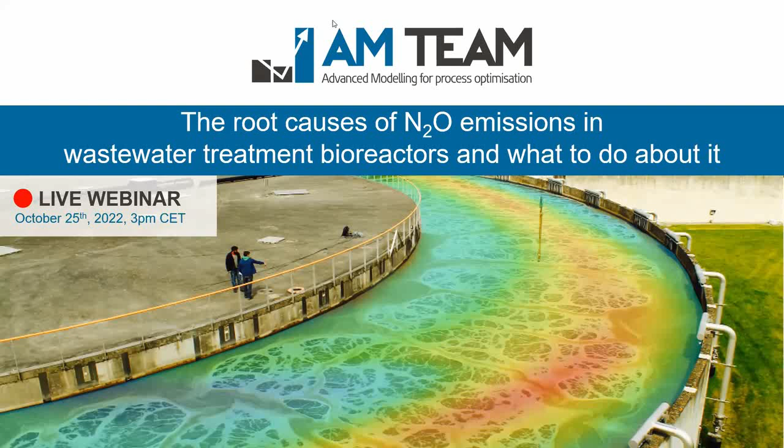Welcome to this webinar on the hot topic of N2O emissions. It is a topic we are all very interested in as a wastewater community, and it is gaining significant importance. And today we have the pleasure presenting you content that relates to the root causes of N2O emissions in wastewater treatment bioreactors, and also what to do about it once you know those root causes.

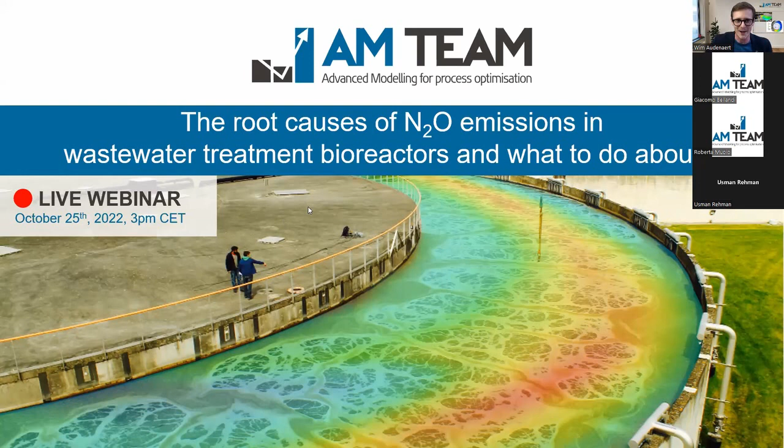So what are the objectives of today and what is the format of this webinar? Well, of course, I already said it. N2O is a very important topic. It was not like that maybe a decade ago, but nowadays the importance is growing a lot, or at least the attention, because as wastewater community, we realize that the contribution of nitrous oxide emissions to the global carbon footprint of the water industry is significant.

And we hope to achieve two things today, maybe a couple of more, but these are the key things. So we want to provide you with new detailed process insights that have really practical value for you, things you can use in your daily operations, and also that you understand the practical application and the potential of CFD combined with kinetics of N2O for assessment of N2O, but also to test mitigation strategies.

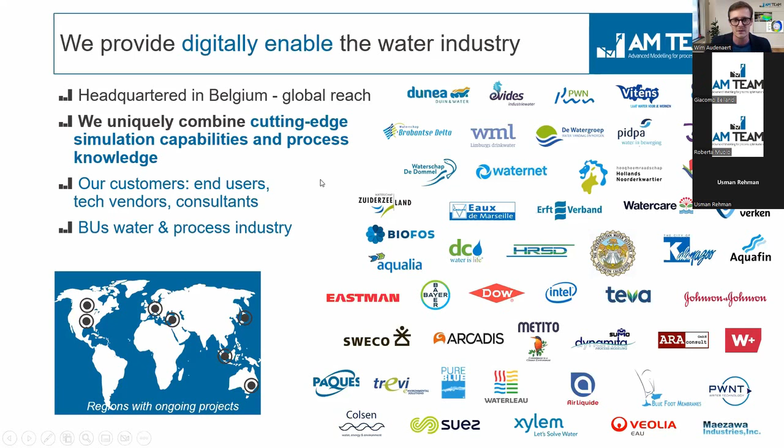So we really want to digitally enable our customers with very good process models. So this is the theme of today. Let's start with me.

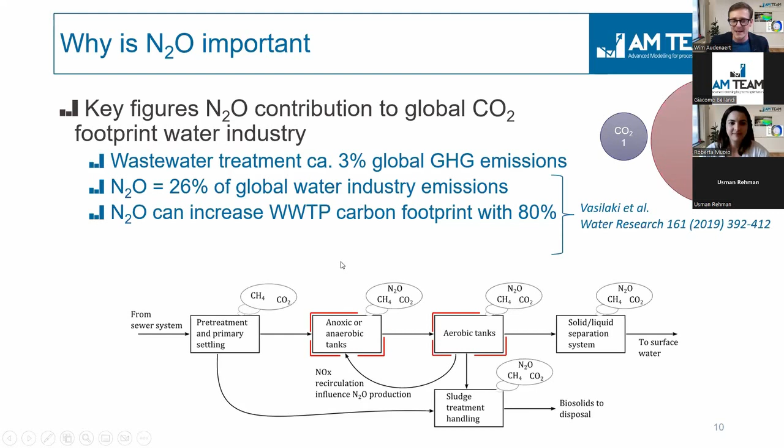And where is it formed? Mainly in the aerobic and anoxic tanks in the biology. That's what you can see here. And this is where we are going to zoom in on in this webinar.

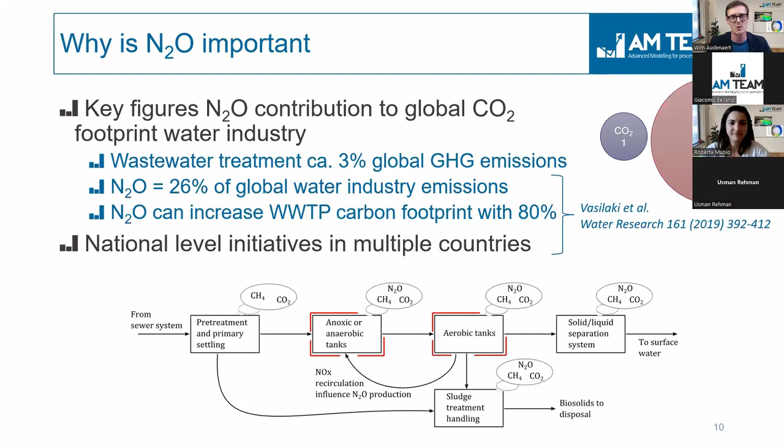Multiple countries worldwide start focusing on it heavily, and actually every year this list is growing. Now we see a drastic increase of attention on this topic.

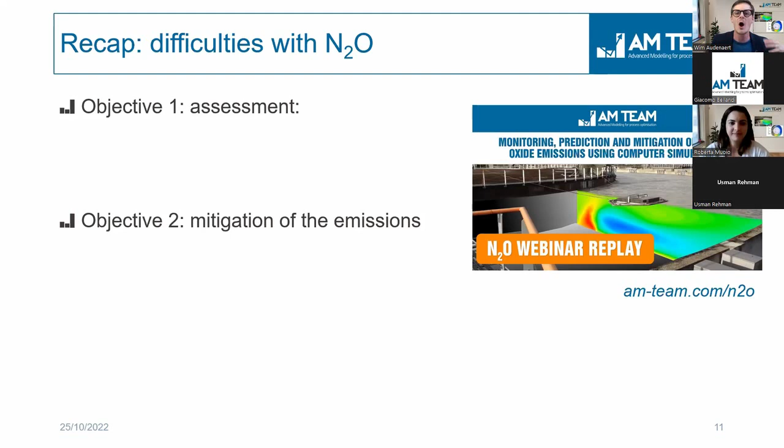So in the last webinar, we asked the question: what are the major difficulties practitioners face? Actually, you can divide them into two categories. The first one is the assessment: how good or how bad are we doing? Typical questions that pop up there are: how is the N2O emission at my plant? Which ones are the hotspots? How do I prioritize, and how do I adequately assess those emissions?

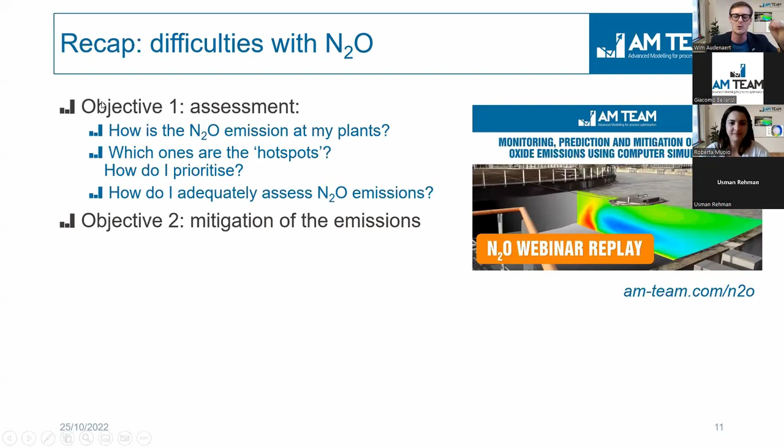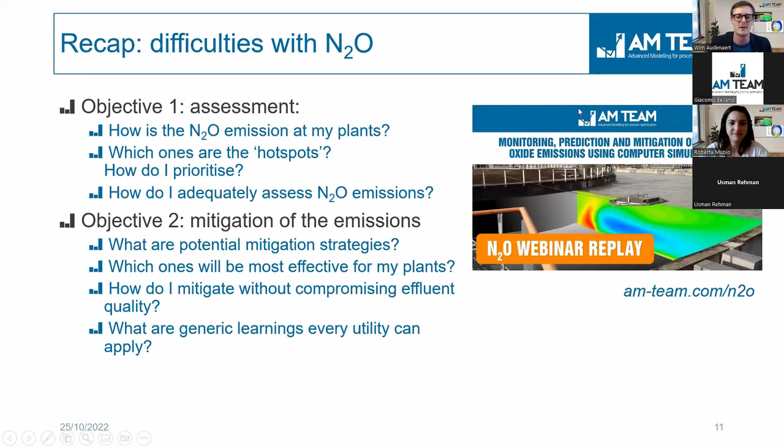Another slide from the last webinar is what drives N2O emissions. On the one hand, we have influent quality. We shouldn't need to explain that changes in quantity and quality matter, and you have to adapt your operation to that. Also, operational changes can be made, and they can be very specific for plants.

And then, of course, you have a huge variety of systems. We don't only have conventional activated sludge, for example, but even within one category, you have a tremendous amount of different designs -- that's the reactor type and design. And a very important topic we wanted to highlight is also the local conditions.

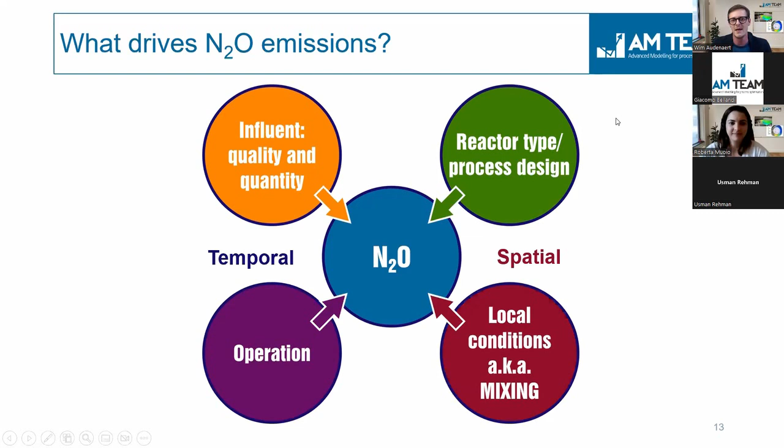This is very visible if you combine CFD, which is actually a 3D simulation, with biokinetics. So what we see on the screen right now is a bioreactor, a top view and a side view. If you do some simulations, you can visualize gradients of local oxygen, local ammonia, local N2O, local nitrites, and things like that. This is possible with this combined framework.

Typically, when we look at full-scale systems, you see very drastic gradients, not only in the length, but also in the width and the depth. Just look at where this gas hood is measuring. You can already imagine that if you moved it a few meters, or you're measuring liquid N2O and you moved your sensor by 5 or 6 meters, it would have an impact on how you take conclusions and how you calculate your emissions.

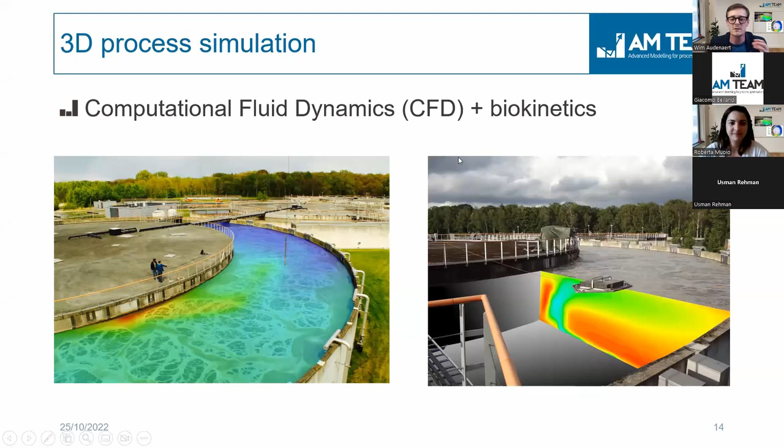This topic has been important in the previous webinar, so feel free to watch it back. And next to mitigation, we also support these measurement campaigns very well with this tool.

Okay, so that was a short intro, setting the scene a bit. And now we go to the meat of this webinar. We decided to go rather deep into the mechanisms of N2O because we think it's very interesting to understand them, and that you can take better decisions based on them. We try to make it digestible for people who don't have too much background in N2O. We took that risk, but don't misunderstand us. We will go deep, but the practical outcomes are what we try to illustrate in the last part.

So the root causes of N2O production. When we look at the basics of wastewater treatment, most of you know nitrification and denitrification. That's really the core of nitrogen removal. You have two bacteria, the autotrophs and the heterotrophs, that are collaborating. It's the same in a conventional system or a biofilm system. The configurations are different, but they are collaborating.

The first group, the autotrophs, oxidize your ammonia and add oxygen more and more until nitrate. This is nitrification. If you feed this to heterotrophs, which eat carbon as a source, they are more comparable to humans - they eat organic carbon. The autotrophs don't really eat organic carbon. That's why there is nitrogen here. These bacteria bring it back to nitrogen gas, which is of course not a greenhouse gas, but in the process you have a side step, an intermediate, called nitrous oxide.

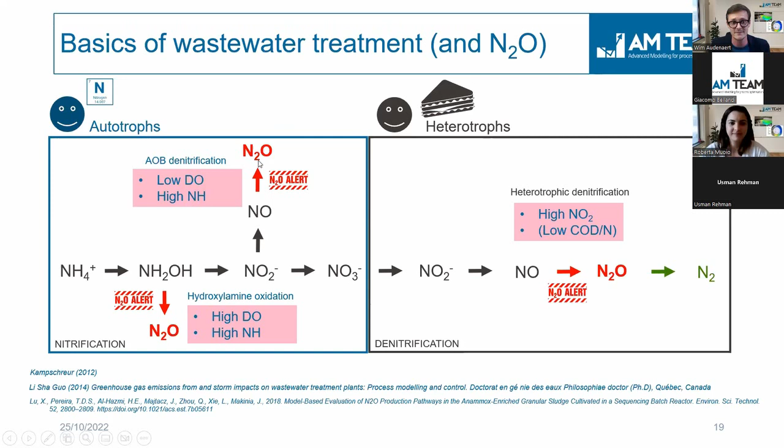Then we go to the autotrophs, and unfortunately they don't really work in a straight line. These bacteria have a side track, and it depends on local conditions. Typically at very high dissolved oxygen and high ammonia, they can form N2O from an intermediate called hydroxylamine. That's one pathway. Unfortunately they also have a second one from nitrites - they can also form nitrous oxide, under different conditions, this time low DO and high ammonia. So that's a summary of this mechanism.

So if we summarize it in three lines: autotrophs can produce N2O in two ways, while heterotrophs can produce N2O in one way. But importantly, they can also consume N2O in one way, so the net balance might even be negative or neutral. That's the summary.

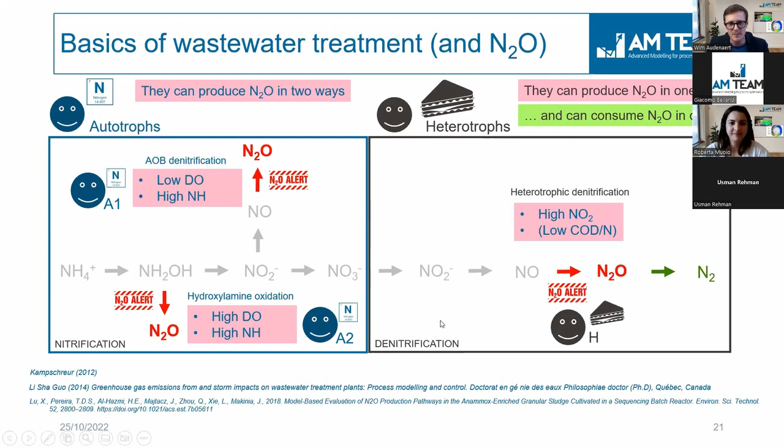To make it easily digestible, we will refer back to these blue ones, the autotrophs, as A1 and A2, and we will refer to the heterotrophic pathway as H, the brown symbol. So if you see these symbols reappearing, these are the three pathways of N2O formation. Good, let's go to a case example.

We will give the floor to Roberta Muoio, and she will introduce a real case example. Roberta, the floor is yours.

Thanks, Wim. So here we are presenting a pilot scale reactor, which is currently used by the water utility Watercare in New Zealand to investigate N2O emissions under different operating conditions. They are doing measurements under different, for example, influent conditions to evaluate the N2O emission. We are collaborating with them within a project, and the goal is to enhance piloting and an on-site measurement campaign to improve process understanding about N2O and biokinetic ASM in general, and to obtain effective mitigation of greenhouse gases.

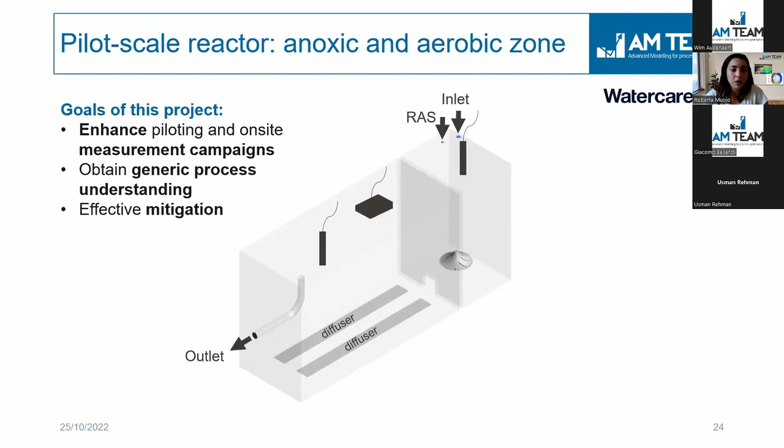So this is what we would measure. In this slide, you can see the liquid N2O concentration and the gas N2O concentration. This is a 3D CFD simulation, what we call a volume rendering—a 3D visualization of a concentration of a certain variable, N2O, inside the reactor.

On the left, we see the dissolved liquid N2O concentration, and we can see higher concentration in the anoxic zone and lower concentration in the aerobic zone. Red means a higher magnitude of concentration, and blue means lower concentration. We can also see in the gas that the higher gas concentrations are in the top part of the reactor and in the central zone where the plumes get out of the system.

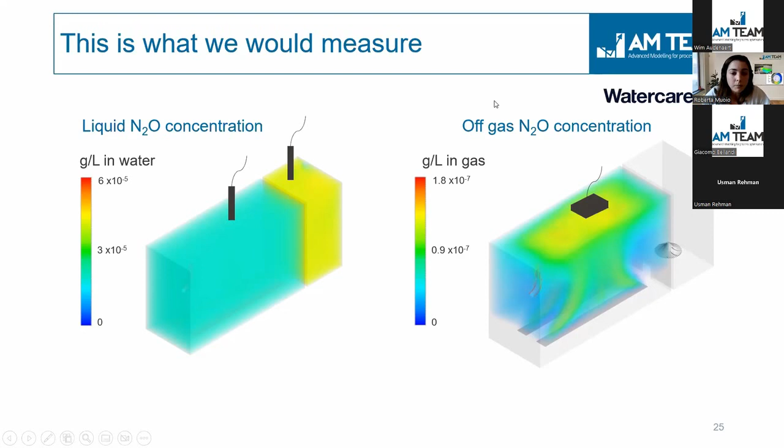So this is exactly what we would measure in a measurement campaign, placing some sensors.

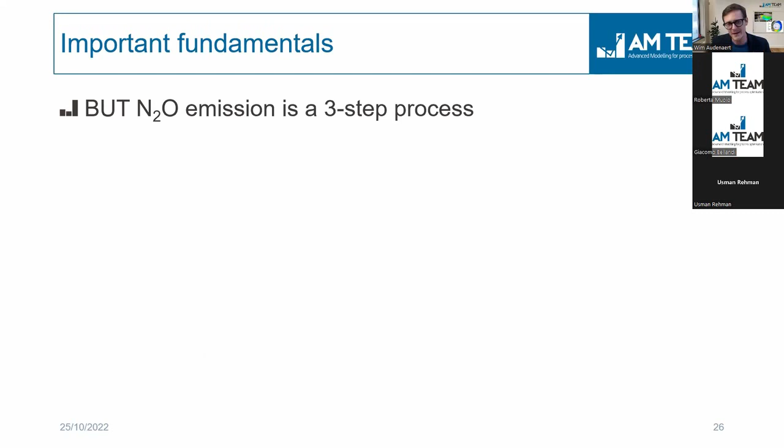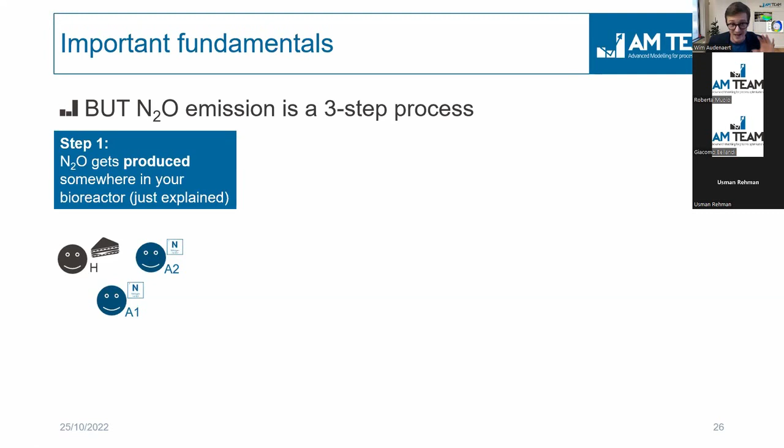Thanks, Roberta, for introducing this case. We will come back to this case later because this was not really the root cause. But what we would like to touch upon is the three-step process. What Roberta has shown is actually the result of this process. The first step is N2O, nitrous oxide, gets produced somewhere in your bioreactor. I already explained how—there are three main pathways, either by these bacteria or via the two pathways of the autotrophs. Just imagine they would not produce any N2O, we would not have an N2O issue. So that's really the root cause: these three pathways.

What happens secondly is, even though N2O is a gas, it actually starts in the dissolved form. So it gets transported through the water flow of your system, which makes it hard to know the root cause because it's already moving away from that. You will measure it somewhere in the form of liquid N2O.

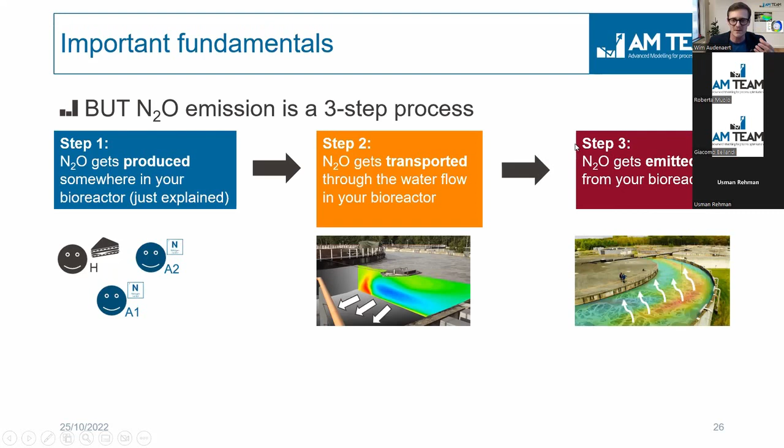And in a third step—and this is really causing the emissions—your N2O gets emitted because it gets stripped due to the aeration. The liquid N2O joins the aeration bubbles, the air bubbles, and goes up, and this is really causing the emissions.

So what we really measure, typically with liquid sensors or gas measurements, is the N2O in the water phase or the gas phase. But really the root cause is here. And what's also important is that what gets emitted is what causes the climate impact. So we have to distinguish between what we can measure, what causes the climate impact, and what is the root cause of the problem.

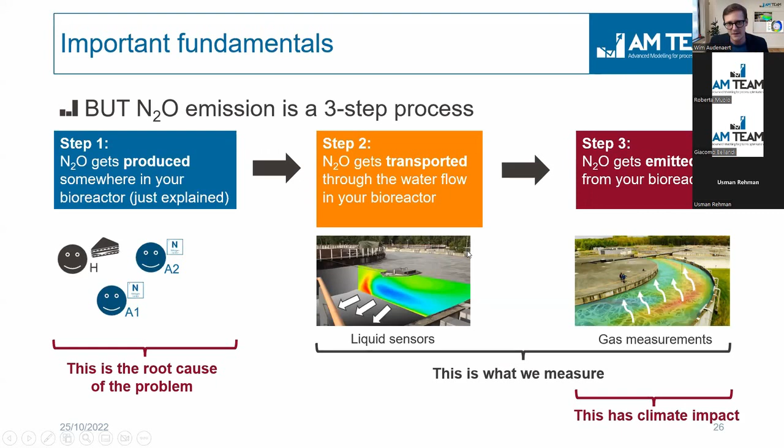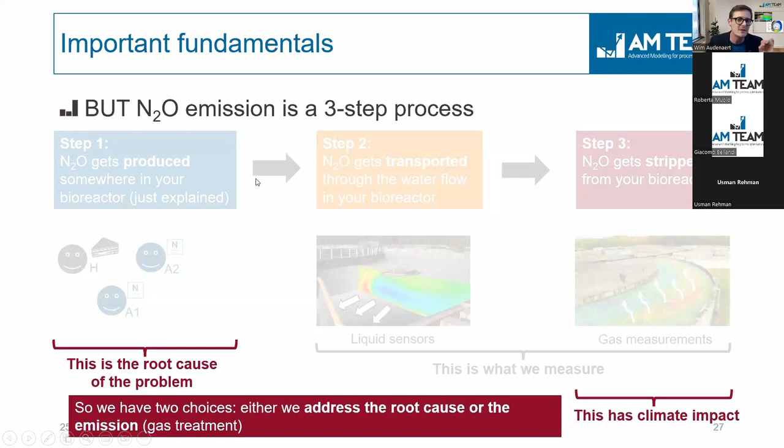If you approach this from an engineering point of view, we have two choices: either we address the root cause, which means avoiding N2O production or lowering it, or we treat the gas—an end-of-pipe solution. For some reactors, this works because they are covered, and then you also avoid the environmental impact. But in this webinar, we'll be focusing on step number one, the root cause. We believe if you understand the root cause, you can really effectively mitigate.

So Roberta, back to you. Yeah, thanks, Wim. So back to the pilot reactor—here again we see the dissolved N2O concentration in the liquid, in the anoxic and the aerobic zone.

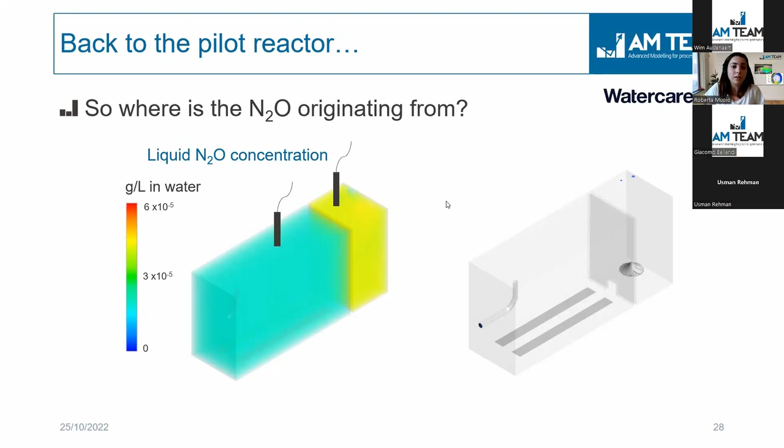What is interesting to see is that the concentration is quite homogeneous in the reactor—higher concentration in the anoxic zone and slightly lower concentration in the aerobic zone. So actually here, if we put some sensors, we are measuring the symptoms, but we don't know exactly where N2O is originating from and why it is produced.

So then if we go a step back to step one that Wim mentioned, we would focus on the root causes. Here we are looking at the production rate, the speed of reaction of heterotrophs in this case—how fast heterotrophs produce N2O, in kilograms per cubic meter per day.

And here we are looking at 2D images—a side view of our system. What we are seeing is that heterotrophs produce N2O, of course, in the anoxic zone, which is expected.

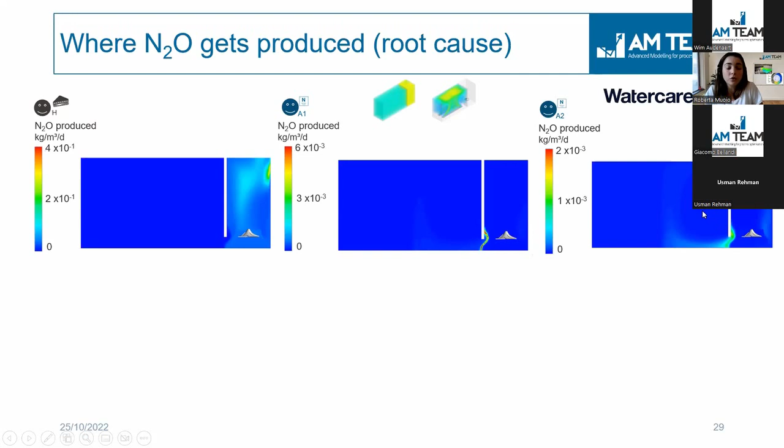Now, if we go to the autotroph pathways, A1 and A2, what we see is that A1 occurs in this transition zone between anoxic to aerobic, where you have lower oxygen but also high ammonia availability, and it's kind of the same for A2 processes. Now, if we would finally quantify the root causes, we would see...

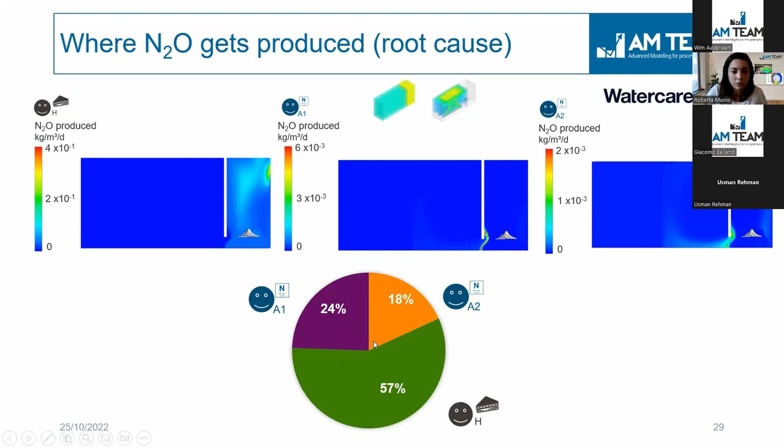In this case, 57% of the N2O is produced by the heterotroph and the remaining fraction by the autotroph. So it's interesting to note here that despite the two pathways, A1 and A2, occurring mainly in this transition zone, they account for almost 50% of the N2O production.

Now we can run a simulation, a scenario where, for example, we simulate what happens if our ammonia load increases. It's very common for ammonia to increase during the day in our influent wastewater. So basically what we see is that the heterotroph produce slightly less N2O. But very interesting to note is that now the autotroph produce much more N2O than in the case before.

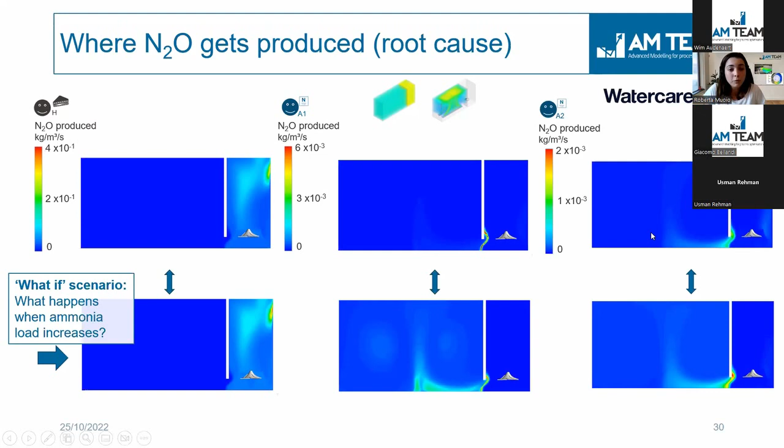So in the end, if we again compare and quantify the root causes, we would see that in this case, the autotroph produce much more. Wim, if you go to the next, please.

Here, if we compare the two scenarios, we would see that with high ammonia, the autotroph pathways are much more important in the N2O production. In particular, the A1 process accounts for 63% of production, while in the low ammonia scenario, most of the N2O was produced by the heterotroph.

So as you can see, a change in the influent composition, or even a change in the operating condition which we will see later, can drastically change the picture and the way N2O gets produced.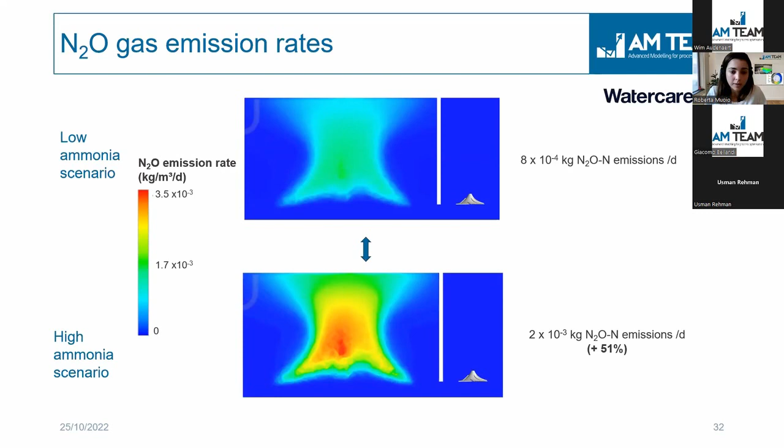So what we see is that by increasing the ammonia load, the N2O emission increases by a factor of 50%. As you can imagine, it's a huge variation that can happen on a daily basis in a wastewater treatment plant. And this is exactly what Explicit also measured with their drones.

Explicit used these drones to map the gas and were able to measure the N2O emissions in the gas phase. If you look at the plot here on the right, you can see that within 2 hours, they could observe a very wide fluctuation of N2O emission, between 50 and 100% difference.

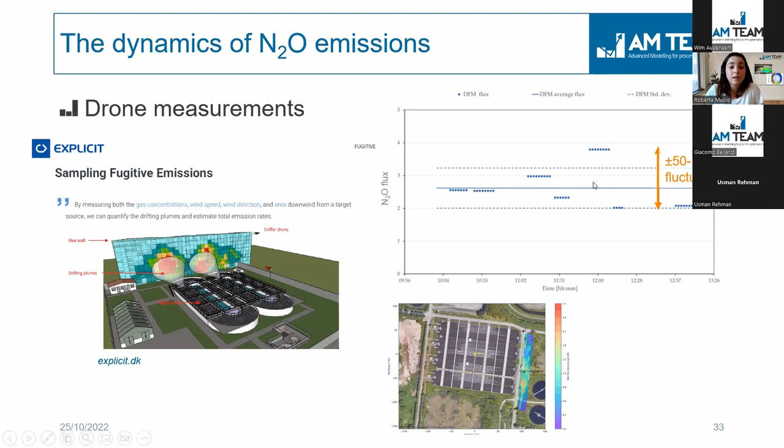And this can be caused, for example, by a change in the influent organic concentration or influent ammonia concentration.

Going back to the pilot reactor, here we see the summary of the N2O concentration in the gas and in the liquid in the two scenarios, low ammonia and high ammonia. This is what we would measure placing some sensor or hood for measuring the off gas. Basically, what we would measure is an increase of N2O in both liquid and gas in the case of higher ammonia.

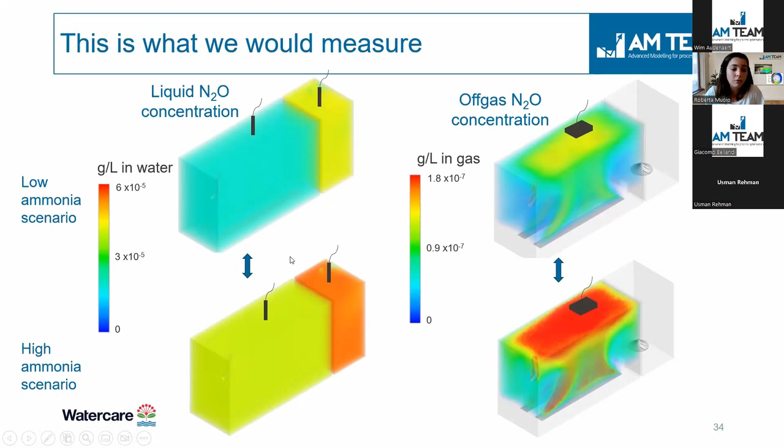Finally, the final goal is to really quantify the emission in terms of CO2 equivalent. Here we are proposing two indicators: on the left, the yearly CO2 equivalent emission, and on the right, the emission factor, how much N2O gets emitted per ammonia influent load.

So basically what we can see is that by increasing the ammonia influent concentration, our yearly emissions more than double. On the other side, we can see that the emission factor is slightly reduced because it's also linked to the influent ammonia, which increases.

So this is just an interesting point to mention: the emission factor should always be accompanied by some other indicator, for example, the yearly emission in this case.

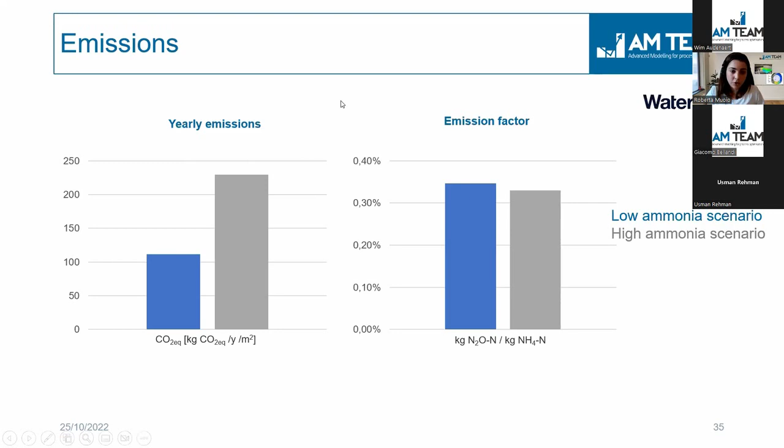Okay, so thanks, Roberta. We will go to full-scale plants in the next section, but this was an introduction because it's a simple system to understand, just an anoxic zone and an aerobic zone. And Roberta has shown that our model brings these three steps nicely together.

So if you paid close attention, what you measure is actually a consequence of the first step, but the gradients of the local hotspots of production are quite different compared to the gradients you would measure on site. And that makes it very hard to interpret such systems or to know the root cause.

So we have explained that the root cause can be found in three mechanisms, three production pathways. If you change the conditions—not only the influent, but also the operational conditions or design—these pathways can react very differently. It all depends on the local conditions of dissolved oxygen, ammonia, and carbon. So on-site N2O measurements, either gas or liquid, reveal the symptoms, but we believe that in order to cure the patient, it really lies in addressing the root causes.

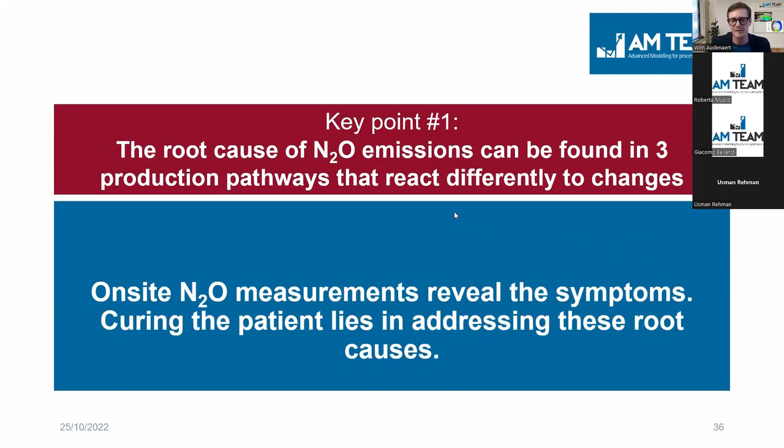Okay, so that was the first intro session on the emissions of N2O. I will go to my colleague Usman and ask if there are any questions.

Yes, thank you, Wim. There are a couple of questions. One question is: is it possible to separately measure or strategically put sensors to measure, for example, the AOB pathway 1 and pathway 2 process?

So maybe Giacomo, are you able to answer this question?

Yeah, thanks for the question. Distinguishing between the two pathways with a single measurement is tricky, and actually the three pathways might occur at the same time. You have production and consumption by the heterotrophs, and then production from AOBs. So with a single sensor it might not be feasible, but you can assist that with current knowledge and the use of models.

Yeah, the problem is a bit—they are not like reactive tracers, N2O 1, 2, 3. We don't know where they come from.

Indeed. Other questions, Usman? There are more questions, but I know you will be answering them later, so I will let you continue. Yeah, we will come back to that—okay, perfect.

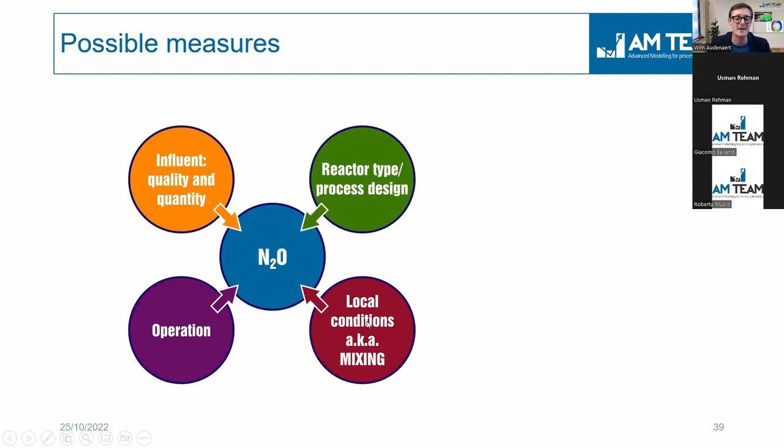Then you have operational measures, for example adjusting aeration, which is a very popular and well-known measure. Then, of course, design and reactor type changes—for example changing a mixer or changing the aeration system. All three together cause an interplay of gradients and mixing, which is very important. So we can play with these things together, but it should be tailored to the plant.

This is what we are going to illustrate in this section. In a nutshell, it comes down to avoiding extreme conditions in transition zones—for example, a moderate dissolved oxygen level instead of a very low or very high one, optimal sludge retention time, optimal COD or carbon-nitrogen ratios, and adequate mixing in the denitrification and nitrification zones to minimize these transition zone volumes. These are all measures that can be taken.

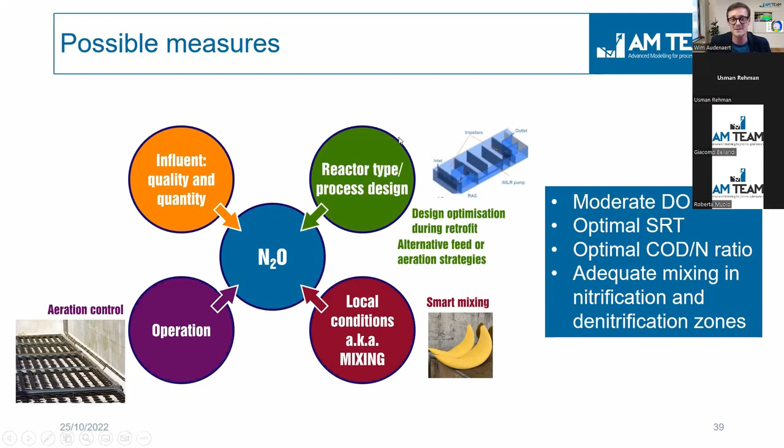But one of the biggest questions our industry has right now is: what are the best mitigation measures? Which ones would work? With one case example here from Canada, Roberta will give some further explanation on oxygen.

Here we're going to see a full-scale bioreactor from a wastewater treatment plant operated by a utility in Canada. Here you see the anoxic, anaerobic, and oxic zones, followed by fine bubble aeration. There you see where the influent pipe is located. You also have internal recirculation for NO3, sludge recirculation, and your outlet pipe.

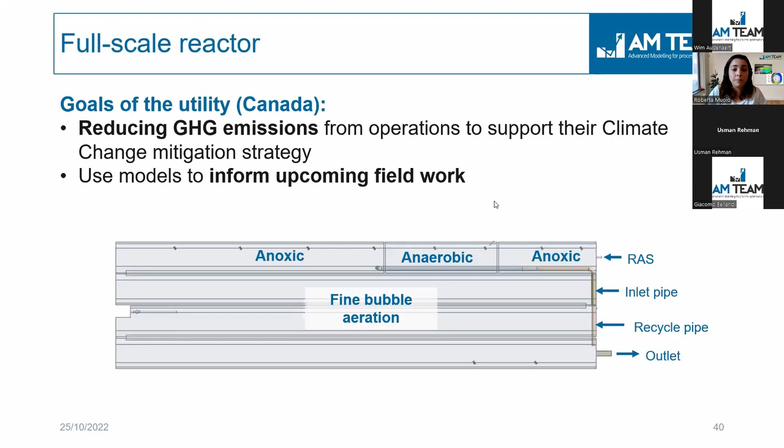We are doing this project together with this Canadian utility because their ultimate goal is to reduce their carbon footprint—the greenhouse gas emissions from operation—to support their climate change mitigation strategy. We are currently collaborating and using the CFD N2O model to inform upcoming fieldwork and support them in the next measurement campaign.

In this plant in Canada, there is a very big challenge with seasonal variation, because in winter the temperature can go down—it can vary between -10 and -20 degrees Celsius. So it's a huge temperature difference that can occur throughout the year.

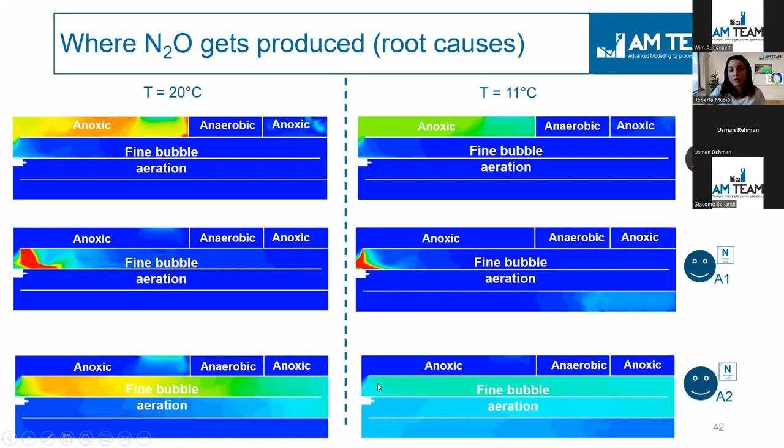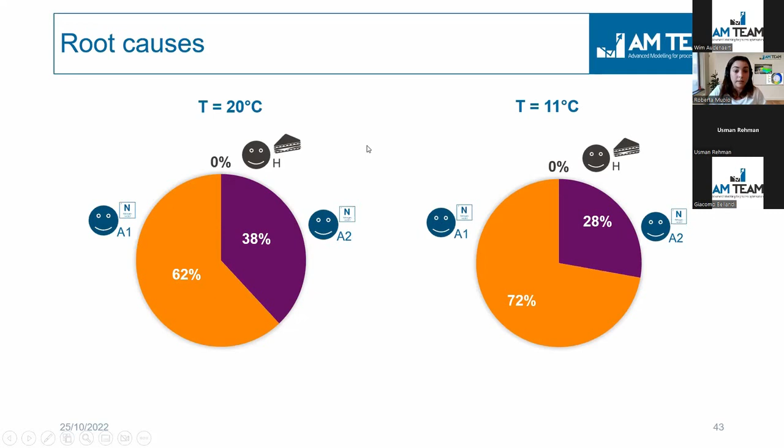So basically here, if we go and quantify the root causes, we would see that in this case, of the N2O emission at 11 degrees, 72% is produced by the A1 process, and the remaining by the A2 process. Similar for 20 degrees. So what is very important here to see is that heterotrophs in this case don't produce basically any N2O. And the reason is that they consume what they are producing, and they are even consuming more than they are producing. So if we quantify the emission, we can see that in the end, at lower temperature, so at 11 degrees, the yearly emission and also the emission factor increases.

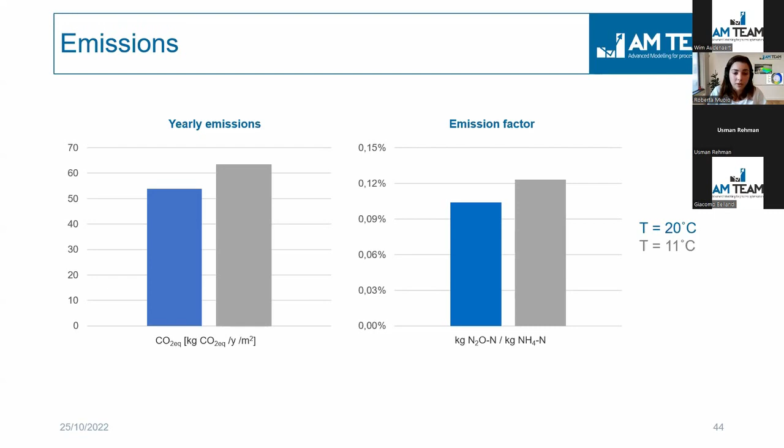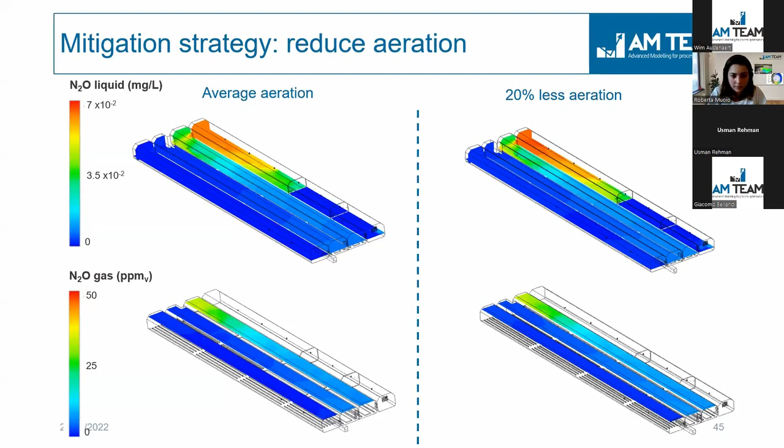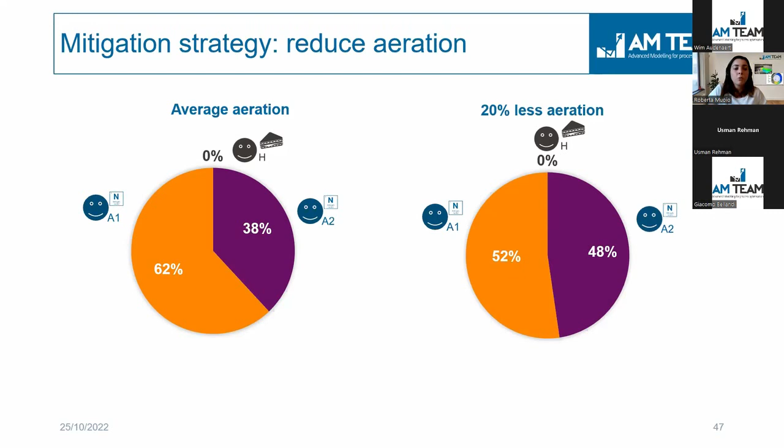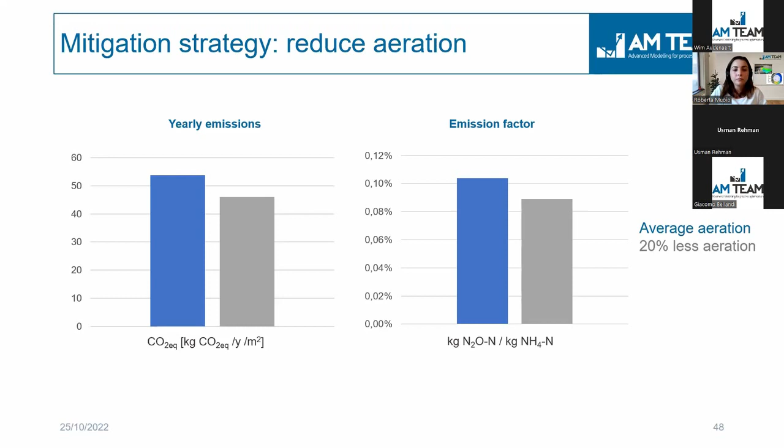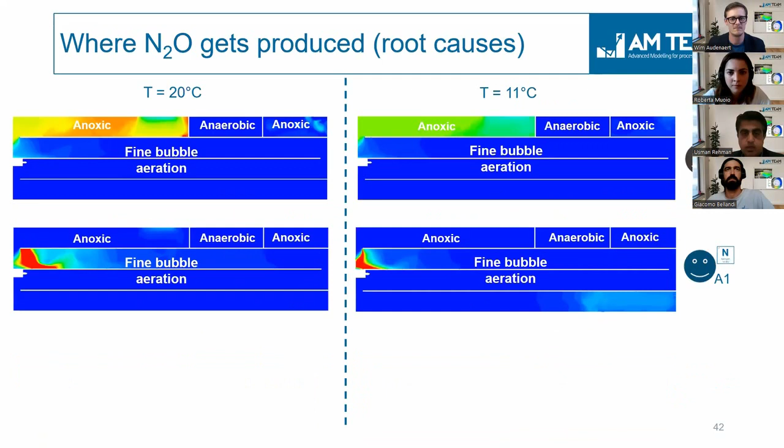Okay, so I suppose there must be a lot of questions because a lot of things pass by. So Usman. Yes, there are a lot of questions, but I will, of course, go a bit strategic. So one question maybe you can respond to is because you showed the graphs between summer and winter for these two plants, and could it be that these changes in N2O could be not because of temperature, but could be ammonia loads or some other factors, seasonal factors?

Yeah, in this case, Usman, indeed, we have actually the people of the water board, water authority here attending. They have done quite some thinking on this, and it's not that easy actually to unravel the root cause, like what is causing this. And so, it's always a combination of looking at the influent, of course, temperature, operational changes, but so far the answer is quite unclear.

Yeah, that's a bit of a struggle when you come and look at the real scale plant, and if you have to really one by one distinguish between all the different factors which are combining or contributing towards N2O. With the model, this is possible because you can actually see one by one which affects to what extent, and that's how you can kind of quantify the contribution from different factors.

Mm-hmm. Okay, do you have time for another question or later? Go ahead, Usman.

Okay. Is it possible that heterotrophic anoxic production of N2O can happen in the aerobic zone? Giacomo, this is a question for you. Okay, yeah, thanks. Indeed, this can happen, especially at the beginning of the aerobic zone, when we have streams entering the first aerated compartment of the aerobic zone. You can have a transition zone with volumes that are still anoxic. It's not black or white, right? Their activity will switch to aerobic gradually, and this will cause the concurrence of different pathways at the same time, and we see it in more or less every plant.

Okay, so Usman, we will come back to the Q&A. Is it okay if we go a bit further now?

Yes, perfect. Okay, perfect. So we focus now on one mitigation measure, which is adjusting your aeration. But there are, of course, other ones that are actually quite proven. For example, this is a slide from Dr. Mikkel Andersen. He's the CTO of Unisense, and he presented this slide at the World Water Congress not so long ago. And what they did in one specific case is increased MLSS levels, so the sludge levels. This is the green scenarios.

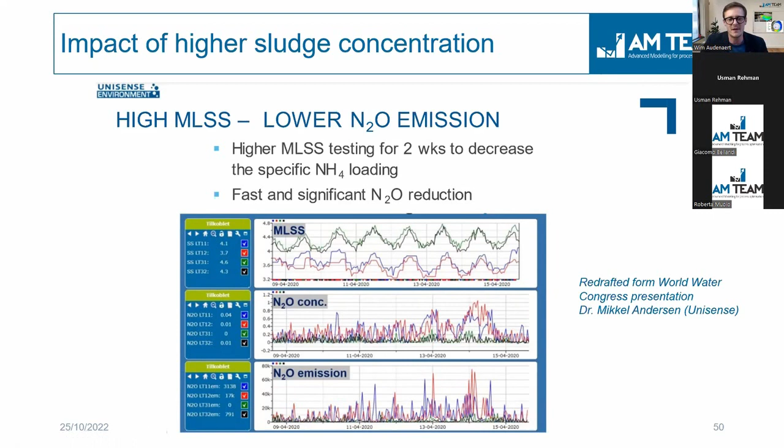And they compare them with the cases with lower MLSS, just the regular, which is the blue and the red line. And in that case, because your mass of the biomass goes up and your specific loading goes down, they could actually reduce the N2O emissions quite significantly. So again, it can be plant specific. In this specific case, this worked and was quite proven as a mitigation measure.

But other measures are, for example, working more at a retrofit, a more drastic change of your system. One of the examples is an aeration system. For example, you could investigate what if we go for a hybrid aeration. What if we complement an existing bubble or a surface aeration system with a pure oxygen system? And this is a project we are currently working on together with industrial customers with Air Liquide.

And this allows to nicely compare these scenarios and look at also the stripping impact, because in this case, stripping leads, of course, to more or less N2O emissions, but it also has an impact on the kinetics. So again, doing these simulations, we can unravel really what happens in different scenarios. So without going into too much detail, because this project is still ongoing, I just wanted to show you a couple of plots of local oxygen and nitrites. So these variables are also available in 3D.

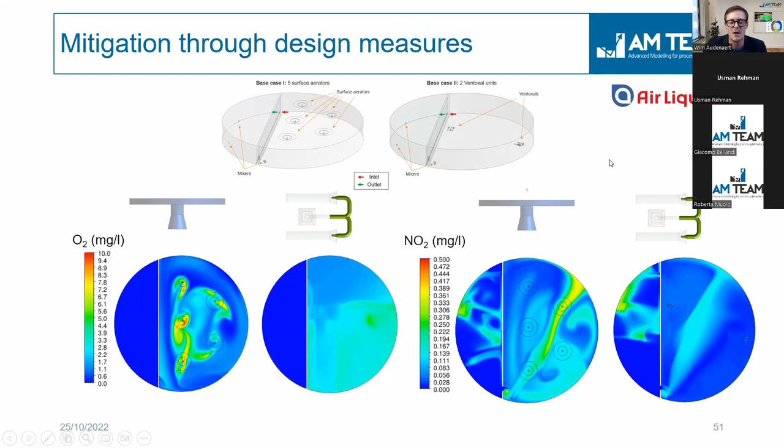So what is the key point of this section? That ideally your mitigation strategies are linked to the root causes. And actually, if you start thinking about it, for example, Roberta highlighted that you can lower your aeration, but you can also refine that, because aeration in that specific plant had also an unwanted side effect. The autotrophic production went up. What if you further refine your aeration to also knock down the production by the autotrophs? It would lead to even more mitigation. So the possibilities are really wide.

And yeah, we have to understand some strategies. Not a single strategy will be perfect. Every strategy will have some undesired side effects. So typically the 4 categories of mitigation are influent, operation, system design, and mixing. So these are the handles you have as an operator to play with, but of course, without compromising the effluent quality.

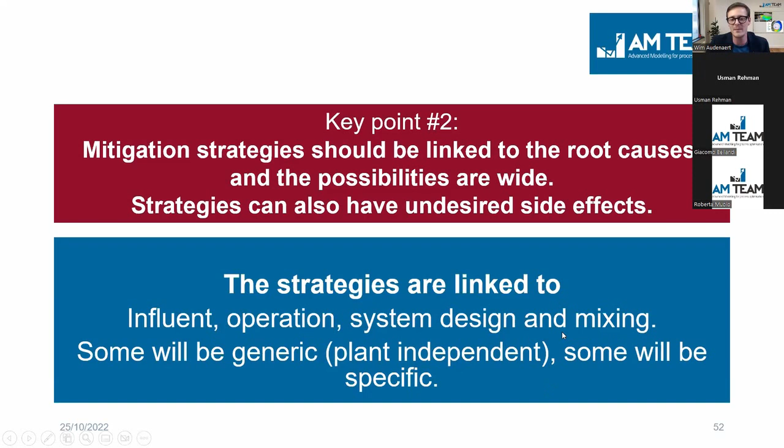And what we really hope is that there are some guidelines that are plant generic or utility generic that everybody can kind of use to some degree. And of course, some of the measures will be very plant specific.

Okay, so then how do we apply this model in a further way? Well, the first phase, and many of the utilities today are in this stage, they are either planning to start measuring N2O, or they are starting to measure N2O. Well, the first phase is this assessment, the hotspot analysis.

So in those cases, we actually run the model alongside measurement campaigns to enhance data, to also guide measurement locations, and then to also do a general quantification of the emissions. In such cases, typically the first results are available in just 2 or 4 weeks. I just wanted to highlight that because I know it looks sophisticated and it might look complex, but in the end, it's a very practical engineering tool.

How does it work? What do we really do on advising measurement campaigns? It is about the resolution of measurements. For example, how many sensors would you use in that specific plant, or are you using hoods or not? Can we optimize that? Can we maybe also look at the duration of your measurements? And what is very important, the location of the measurements.

Because in this plug flow reactor, you see a rainbow pattern, which is always the case in a plug flow system. It's kind of a gradual change along the length. But in many, many systems, we have seen gradients along the depth, but also along the width. So you have to be a bit careful with measurement location.

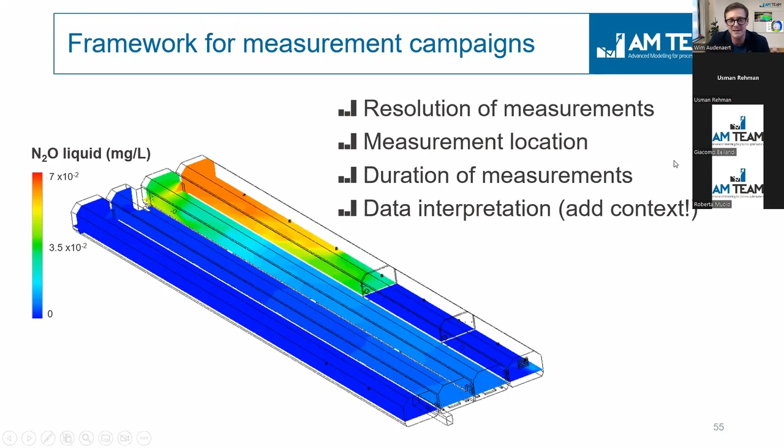And then, of course, we add context to data. For example, if you try to correlate a nitrate measurement to an N2O measurement, but this nitrate sensor is located 20 meters or 50 meters downstream or upstream, you have to have some context there to make sense out of it. So this is what we do in phase 1.

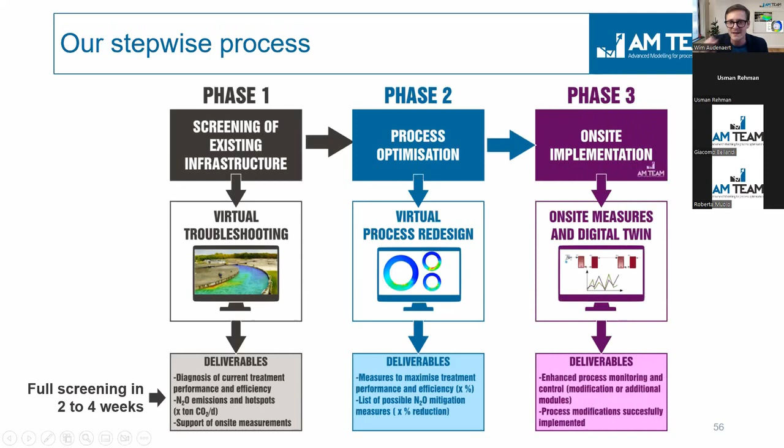Phase 2, typically we do virtual process redesign. So we literally test mitigation strategies. For example, what if you would lower your aeration, or can we further refine it? Winter versus summer, should we do things differently? Things like that. And in a final stage, we go for the on-site implementation using models or using measures on-site to really mitigate without compromising effluent quality.

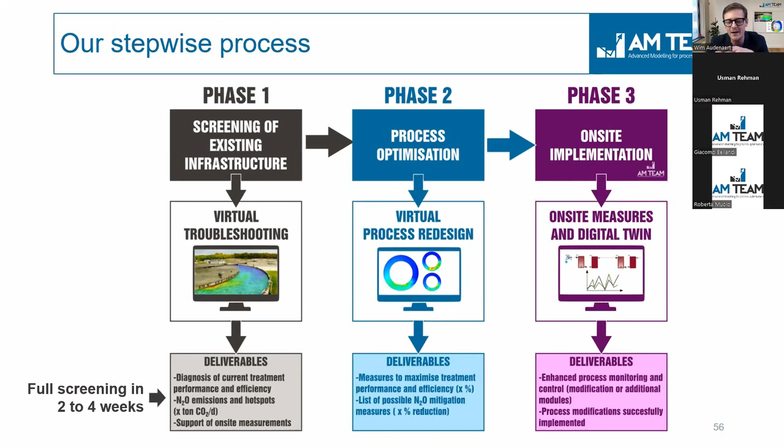And again, typically we look at effluent quality together with N2O, because you can optimize both if you do such a study. Again, this is not a one-man show. Typically, we work with a lot of partners locally that have complementary skills in the areas to provide even better and more complete solutions. Okay.

What is also important is some of you might be working with different systems than conventional activated sludge. For example, biofilm, granular sludge, trickling filters, shortcut nitrogen processes. We are working on those things as well. We just wanted to highlight that we want to broaden the application to those specific, sometimes highly loaded systems.

And then also other developments are the partnerships we are setting up. For example, we have set up a partnership recently with Binnies for the UK, Singapore, and Hong Kong markets for really offering more complete solutions in those markets. Binnies is a consulting and engineering firm. And also we are very open to strengthen collaborations with other parties that have complementary skills.

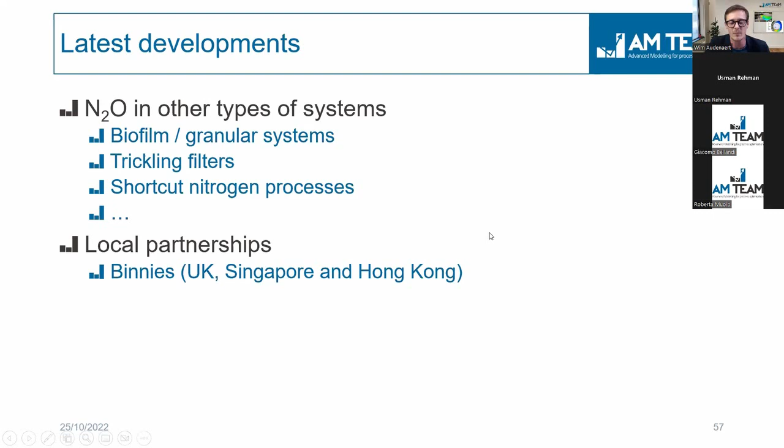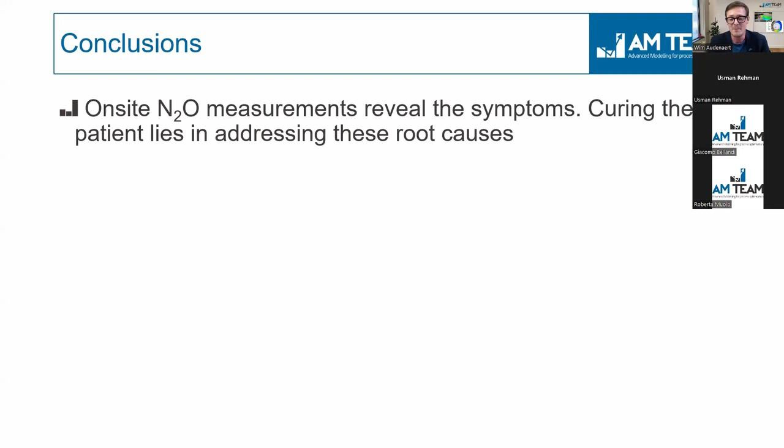So conclusions of this webinar, we believe that the on-site measurements are valuable, of course, because they show you the extent of a problem. They reveal the symptoms, so they see if you are a bit sick, or it's like a thermometer you use to measure the fever, let's say, right? And it's not always that bad, but curing the patient really lies in addressing these root causes.

And ideally, your mitigation strategies are linked to these root causes, and the possibilities, if you start reasoning from that perspective, are quite wide to reduce emissions significantly without compromising effluent quality. Most of the strategies will also have undesired side effects. So you really have to take these into account.

You don't want to lose your effluent quality or have higher operational costs, for example, or some other potential ones. So you have to understand those. The combined tool, the CFD N2O framework, really reveals those root causes and allows what-if testing for mitigation. That's quite powerful because you can do a lot of scenarios before you do any change on site.